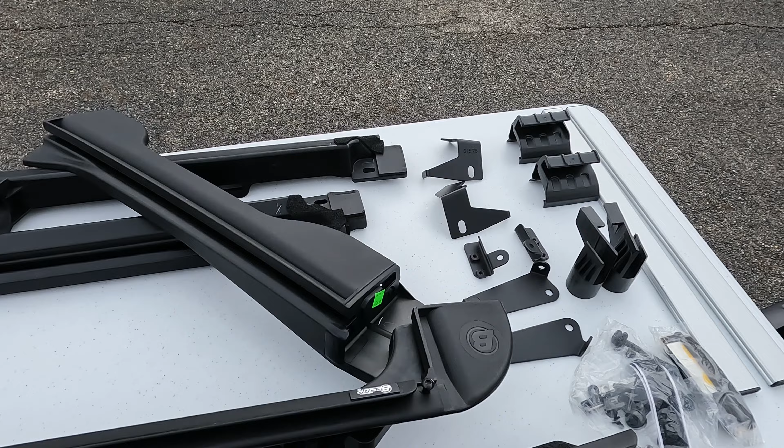We got parts laid out, for the most part, no pun intended. We gotta finish taking off a couple brackets from the old top, and we're rolling. First step, I gotta take this foam seal and stick it along here on both doors, so I need to cut this in half.

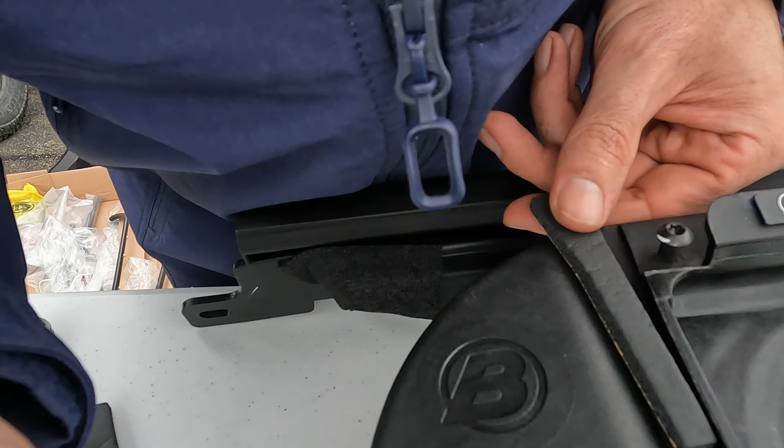Fits perfectly in there.

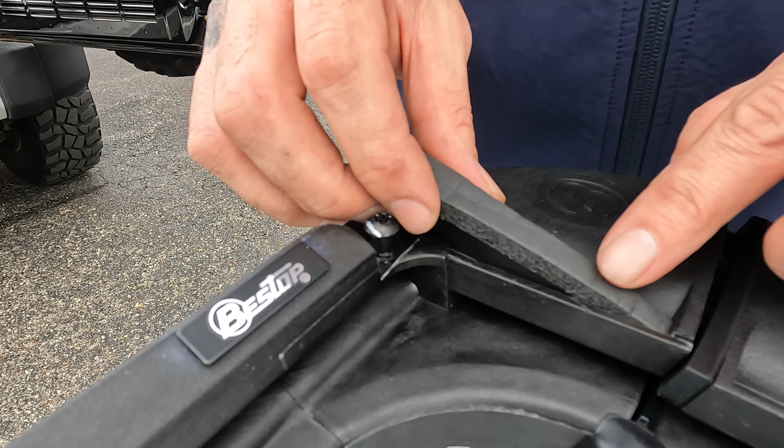You know, I'm very fortunate, I feel I'm very fortunate. There is almost zero screws. Look, that's all the hardware - four of those, two of those, and a handful of those. That's it, that's good. Just a matter of putting big pieces in places and putting one or two screws in it, and we're good. Shouldn't be too bad. All right, next step.

We got to take those corner windows that we just put the foam on and stick them on the Jeep.

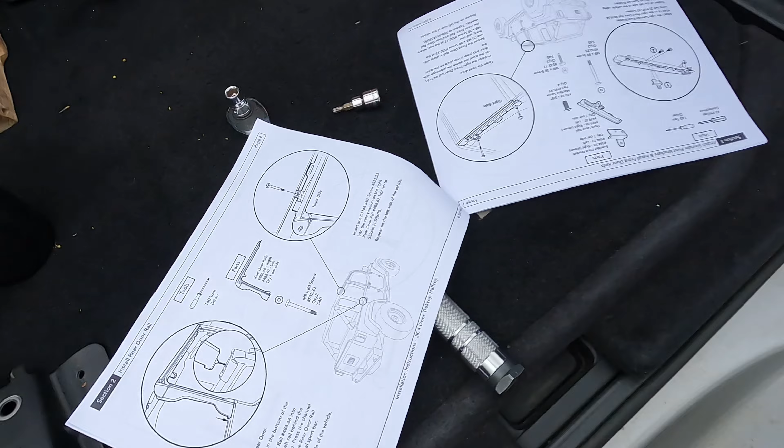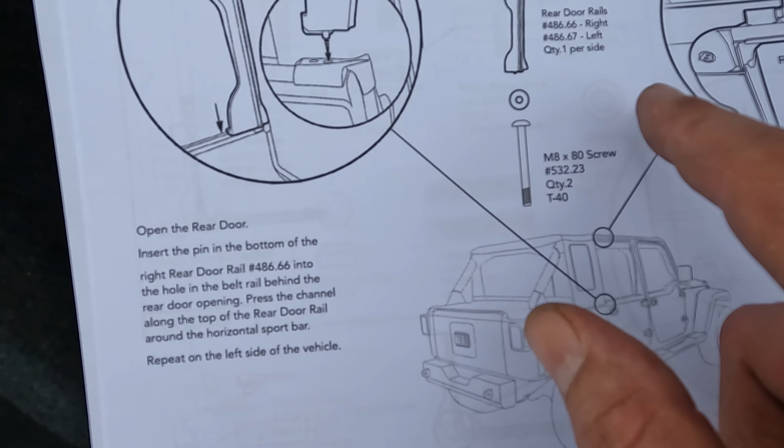Alright, that pin goes in that hole. This goes in here. That goes in here. Good. Now it says take one of those M8 by 80s, two of them, and it goes up top. One of these, I think it goes in that hole. Yep, it goes right in there, and we'll tighten that sucker down. There's the other one.

Good. I'll take the T25 Torx wrench and torque it down. Actually it's a T40, and we need to go 4.5 foot-pounds.

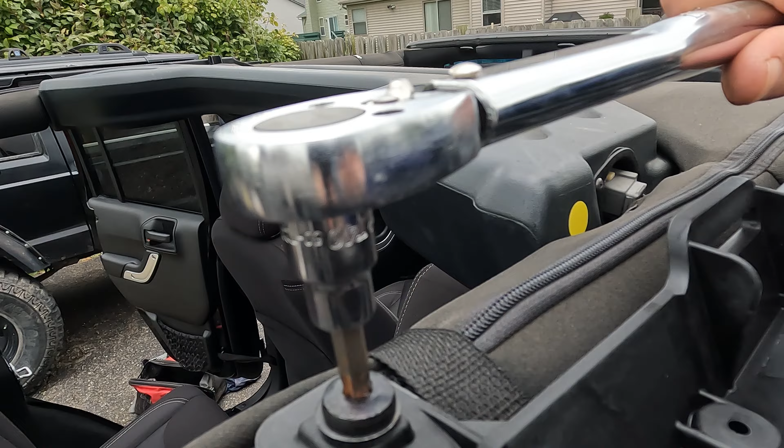So we actually ran into a problem. The nut inside here, the threads, that's a plug - I forget what they call them, but there's threads in it. This screw, the plug came out of the hole, so I can't tighten it down, and I can't get the screw out to fix it. It's stuck, and so that's a problem. I am going to continue to put this together. I'm going to get a hold of Bestop and have them replace that piece. But I gotta get this top on, not put my old one back on. It'll be okay with the door shut.

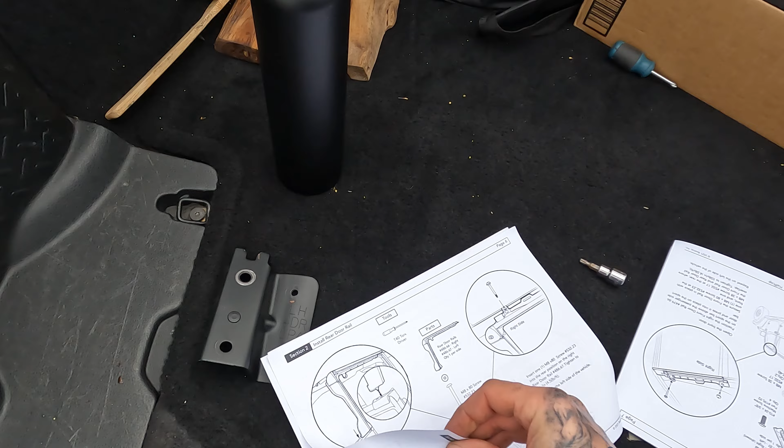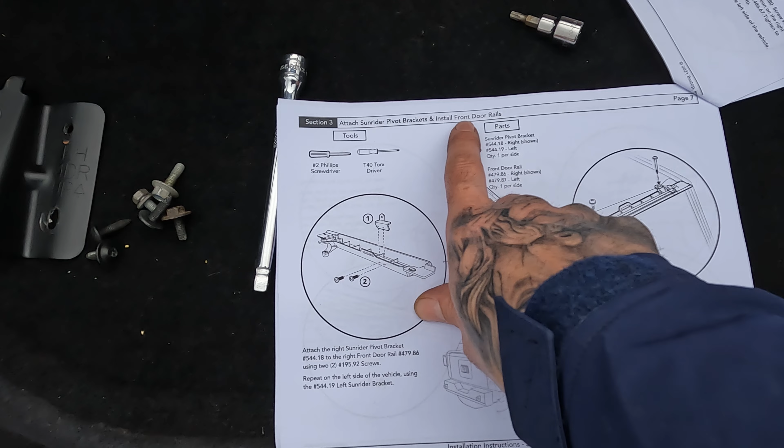Alright, here's where we're at. This side's torqued down, we're moving on to the next step, which is attach Sunrider pivot brackets and install front door rails - meaning those. Most of our screws are in this area.

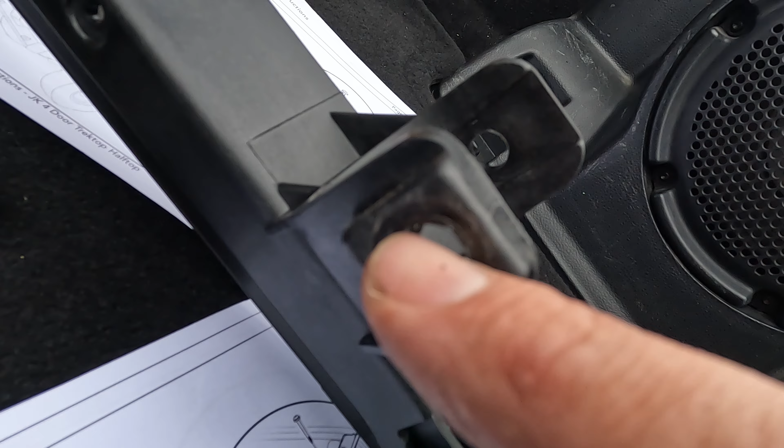Okay, good news, I got the insert, I got it out. You see there's the hole, and this insert with the threads is supposed to go in that hole, and it fell out. So I am going to hopefully insert it and be able to torque it down.

This was probably put in with a press, and I'm afraid to break it. So I'm gonna put this around my roll bar so it gives it support, and then pound it in. It's not gonna be on camera. Okay, that worked, right there, got it in.

Let's install it. It's installed. I was a little apprehensive of torquing it all the way, because I don't want it to strip out again. I don't know.

Low light problems, having low light problems.

Look at that - it literally drew it away from the edge, unlike this one, where it stayed where it's supposed to. I don't think you can see it, but it's messed up. I'm gonna get a hold of Bestop and get that replaced.

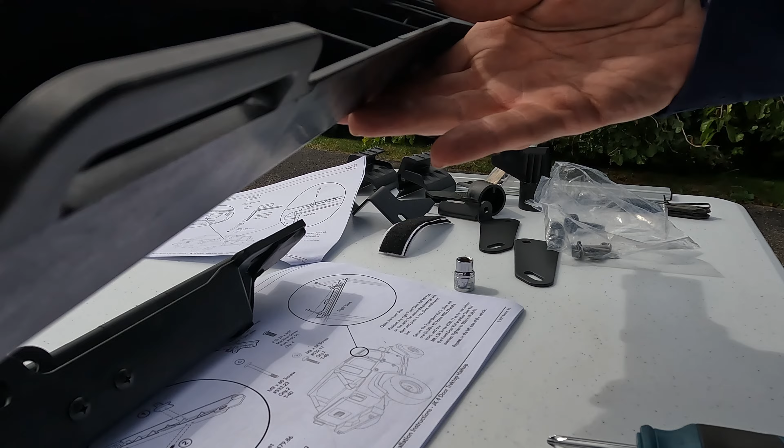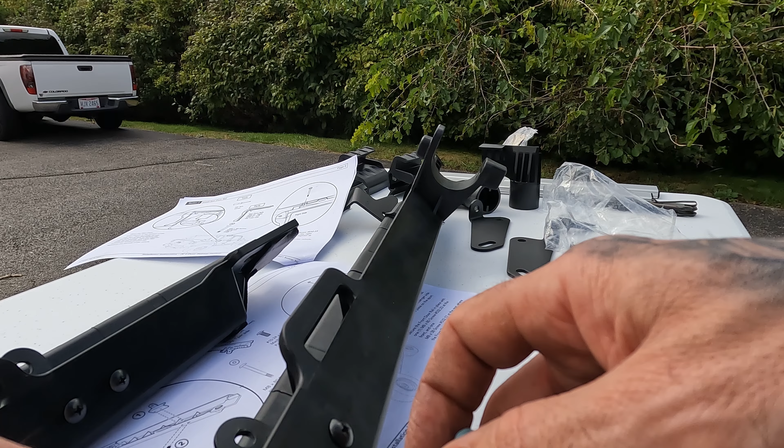Thought it was me. This Phillips, this space in here, is filled with crap, it's filled with crap. Come on, Bestop, that's two strikes. It's literally filled with garbage, with like metal. I don't know if I can get that out of there.

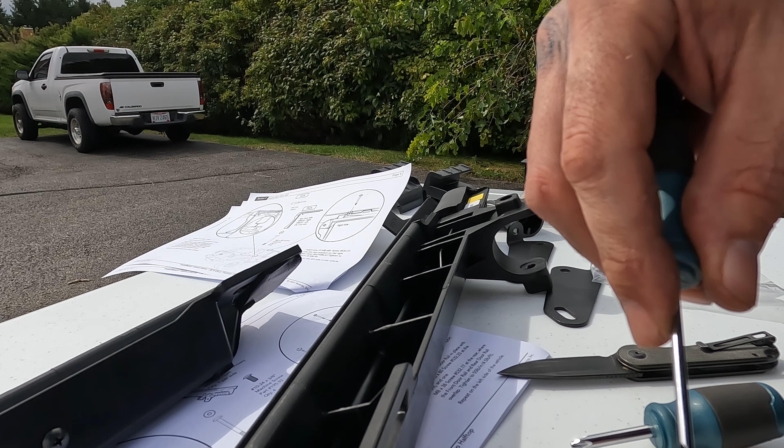Might be able to put in with a flathead.

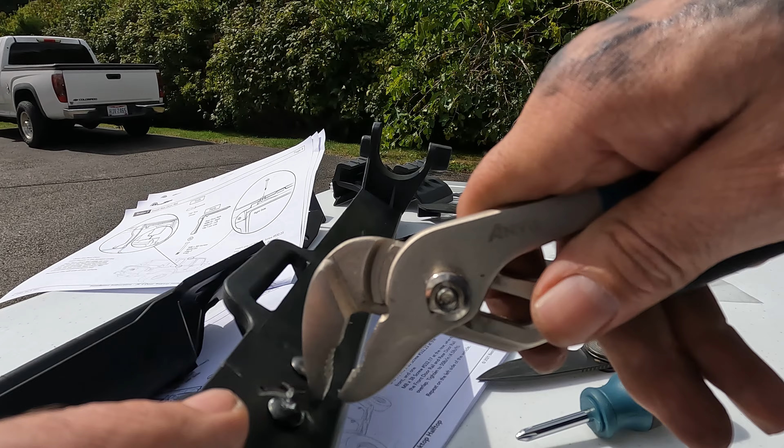You saw how I put that in there, I am not happy about that, but it's not visible, so that's fine. Okay, got that installed. And by the way, this one here in the middle, it says it's a T40 in the directions, but it's actually a T45. That's a T40, T45, and T40.

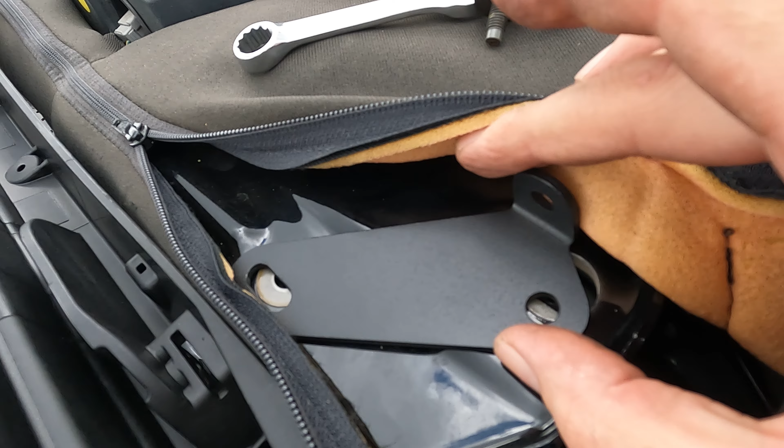Now the other side. All right, next part is attaching this bracket. Basically you have to unzip this cover back, take those factory bolts out, put this bracket in, and then bolt it down with the factory bolts. And you have to cut a slit in your cover to pop that bracket out.

Okay, it's on. So I recommend zipping this back up, finding where that pokes, and then cutting your slit, so it's exactly where you need it. I just put my knife right next to it.

Pushing it through so as little at the top is cut as possible, so you have a nice seal around your bracket. And then do it on the other side. So I think I forgot I was recording this.

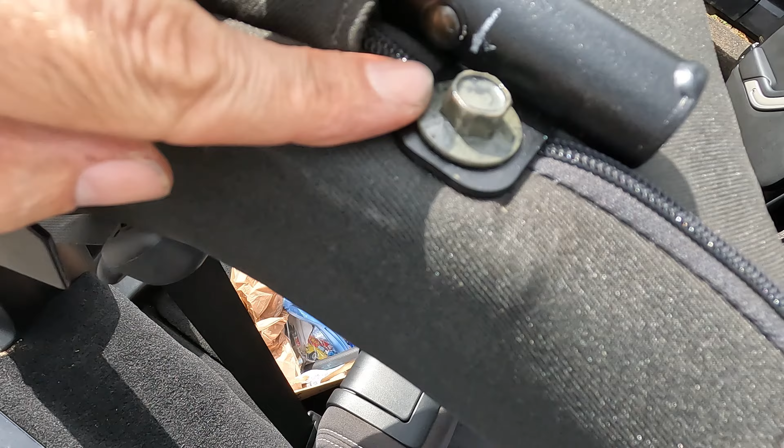So I got this on. You gotta unzip this, undo this bolt, put a little slit in this, zip it back up, put the bolt on. Now I'm working on this part.

This part, you unzip this. This bracket goes here. You gotta take that bolt out. You cut a slit in here and feed this part out on both sides. That's where I'm at.

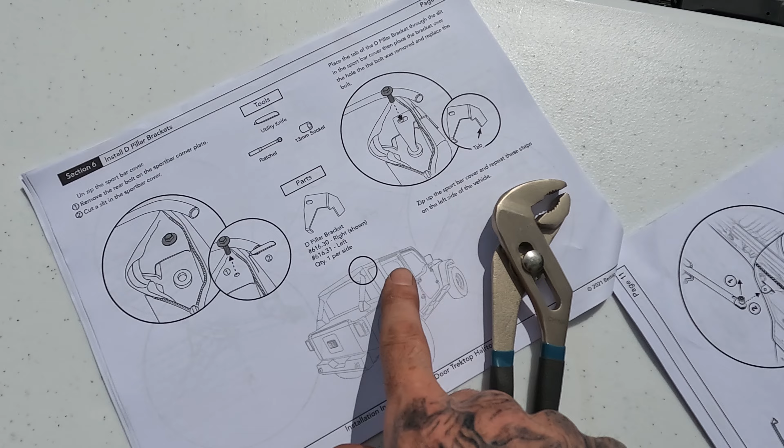Section 6. Here's where we're at. So I did the other side. Got this done, and then I put this on, which is the pivot assembly. You just pull these out and slip them in, and then the pin goes through. It's spring loaded.

Now I'm getting ready to put the top front on. It should be very interesting.

I took the top and I draped it over the hood. These pieces are going to go back and they're going to connect to here, just like these did. Probably. Yeah, there's a pin. You pull the pin. That bracket goes in that slot, this slot. The pin goes in that hole. I don't know if you saw any of that.

I'm not very good at it. I'm doing this by myself. And yes, you can get this where it's at by yourself, if you're strong like me. Do it for Johnny. That was an Outsiders reference, if you're old enough to understand. You get tough like me and you don't get hurt.

Okay, this part of the bracket has this, and that bolts into this hole in the front part. Bolts in that hole right there.